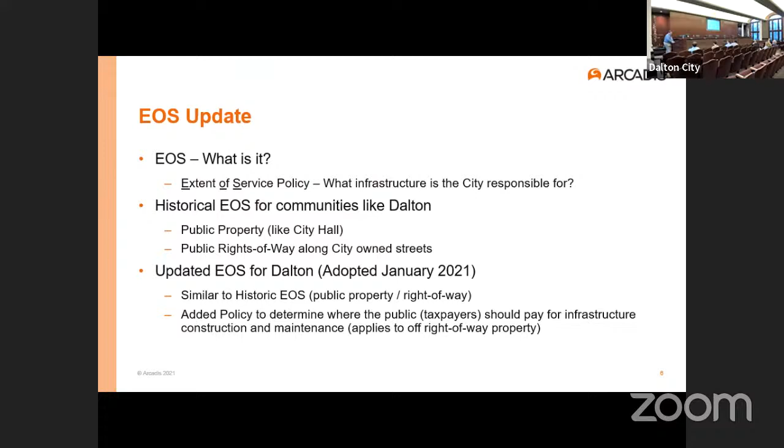In January of last year, Dalton updated their extent of service policy. They kept the historic policy where they're still responsible for roads and public properties, but added a caveat that they will determine where the public, or taxpayers, where your money would be spent working on infrastructure, either building or maintaining it, on off right-of-way situations, on private property. So there's a policy now of where they think the public should have an investment in infrastructure that's not on public property.

This is kind of a précis of the actual policy, but they will work off right of way on drainage systems if the system is connected directly to the city's existing system. Think about a couple inlets on a road with a pipe between them. The pipe comes out one side, goes off the right of way, and dumps water into a ditch. It didn't seem fair that the private property owner should be responsible for that last 20 feet of pipe, so there's a clear case that part of the system is actually part of the public system, and they should take that on under certain conditions.

Another factor they look at is if there's a significant amount of stormwater runoff conveyed by the drainage system that's generated by city-owned property or city right-of-way. In the case of Walnut North, if you're living just south of Emory Street, there's about 50 acres of drainage coming down off the city cemetery, city-owned property, and off Emory Street, and then it goes into private drainage systems. So there's a case that the bulk of that water is coming from city property or city-owned right-of-way.

There's also a case to be made that in select situations, the failure of a drainage system could result in a significant threat to the public and/or adjacent property. So it's kind of a catch-all: if this pipe collapses, 50 homes in this area may get flooded. That would be a case where there's probably a public benefit to maintaining that infrastructure with taxpayer money. So those are the three cases we'll look at for off right-of-way property. Remember, everything on the street is still the city's responsibility, it's just a question of where we'll consider going off right-of-way.

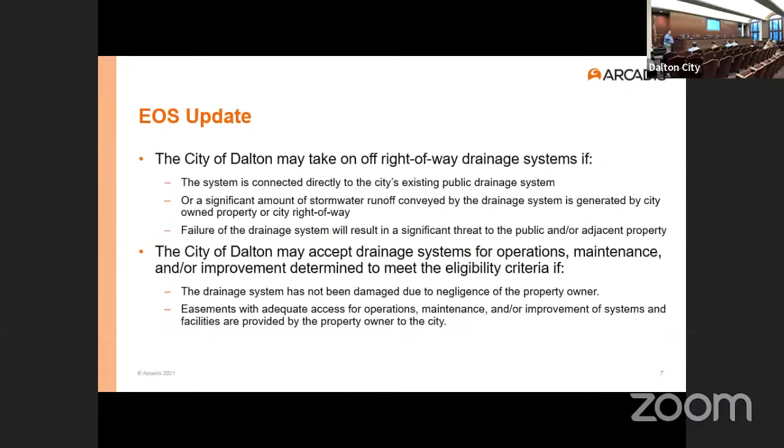The other situation where the city feels it's just too great a risk is if a pipe goes under an existing building. There's a lot of risk when you start messing with pipes under buildings—you could damage the building doing that. So that's one of those situations where it gets to an unacceptable risk level.

But prior to accepting the drainage easement, if you're in a situation where we can do work off right-of-way in that area, the public works director will prepare and provide the city council a corrective action plan to address known deficiencies with the drainage system.

So why that's important: let's say you've got a pipe on your property. Chad, the public works director, can't accept an easement from you—that's not his job, that's outside the city council, the guys that sit up here. They're the ones that accept it on behalf of the city. They'll positively say, we will accept this drainage system and expend public monies on it. It can't be some deal that somebody works out with Chad, or Jackson, or even Andrew—this is beyond their pay grade.

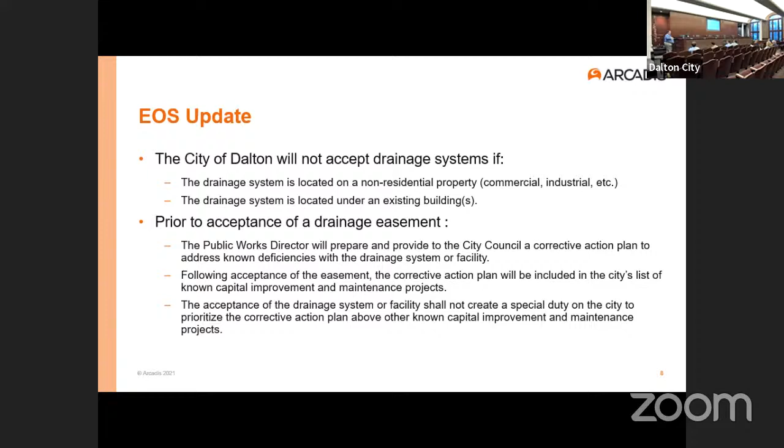So let's talk about that list, the capital improvement program, CIP—sometimes you guys hear that term bandied around. That's what we're talking about here. Currently, we're cataloging and prioritizing known stormwater needs. The last time I looked, there were over 40 projects on the list of issues that need to be looked at.

A lot of the project types involve flooding of homes, flooding of buildings, stream degradation resulting in potential property damage, and failing infrastructure. We've got a lot of pipes—we've got an inventory. Literally, the city has a map of all the drainage pipes on public property, rights of way, and things like that. I forget, there's thousands—I want to say there are like 10,000 assets in that database.

Of those, we've got quite a few what we call Tier 1A assets. These are pipes that go under a road—if that pipe fails, there's no way for residents to get out. It's a one-way-in, one-way-out neighborhood. That pipe collapses, they can't get out, emergency services can't get in. These are high risk assets, and there's quite a few of them.

I don't remember the exact number, but 3,000 linear feet of those are corrugated metal pipes with about a 25-year life expectancy. Jackson here actually went out and looked at every single one of them, and those are being put into the list as well for rehabilitation. And then finally, we're looking at stormwater management infrastructure—things that can be done to reduce flooding.

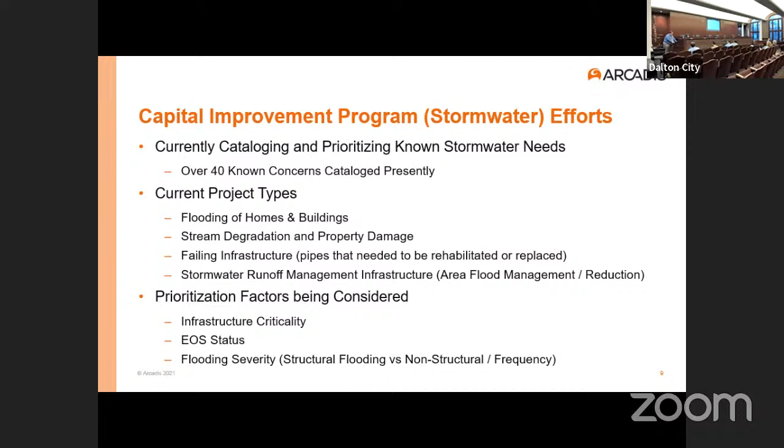So that all goes into how we got to today. We've got flooding problems on private property that are within the extent of service policy. We've got houses flooding with a significant amount of water coming from public property. And that's how we got to today.

But before we jump onto the Walnut North project, we're going to talk a little bit about some of the recent efforts and current efforts so you guys can see what we're talking about. Jackson's going to come up and talk about that right now.

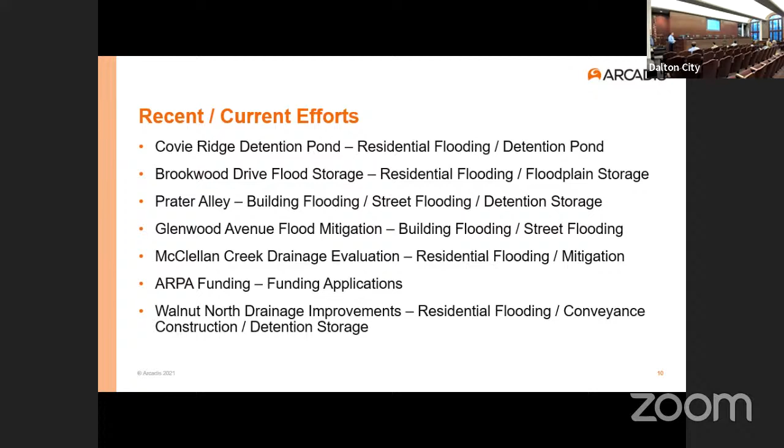So what I'm going to go through is some of our recent completed projects, as well as our current efforts throughout the city. Just a brief overview.

Starting with Covie Ridge, this is a completed project. This particular location resides within the Mill Creek watershed and has experienced historical residential flooding as well as structural flooding and street flooding. What the city has done is develop and implement a detention pond on undeveloped property to provide meaningful flow attenuation and reduce the flooding risks and hazards within this drainage area.

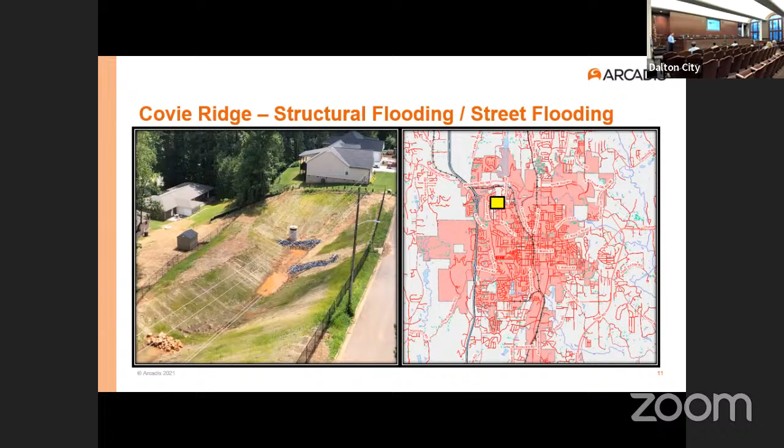Next one is the Brookwood Flood Storage Project, a recently completed project as well. This particular location is vulnerable to flooding—the property where we implemented a flood storage area resides within a 100-year floodplain. We accomplished this under voluntary participation with the property owner: the city purchased the property and removed the impervious surface, displacing water within this drainage basin, and provided a flood staging area prior to entering state waters.

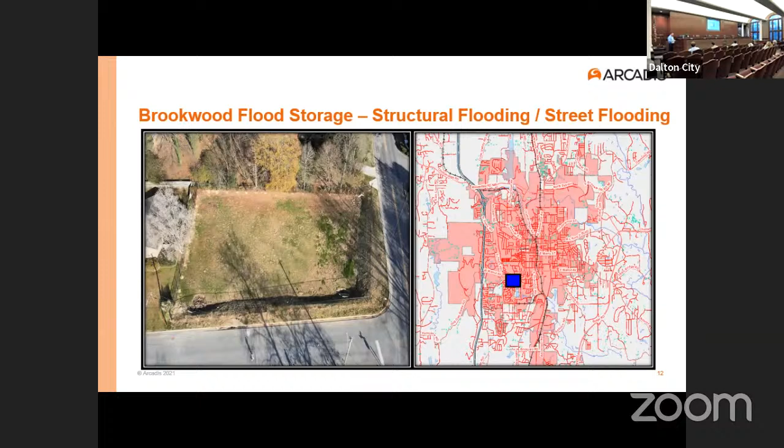This is a prime example of a floodplain restoration project. We're hoping to do similar floodplain restoration projects, not necessarily from existing properties, but we're looking to identify similar situations citywide. Next one is the Prater Alley Drainage Basin Study.

This is one Arcadis has been working on for quite a while now. This is a particular location with historical flooding and structural flooding hazards, and what the city is looking to do is implement an underground detention system upstream of these issues to provide meaningful flow attenuation and reduce the flooding hazards.

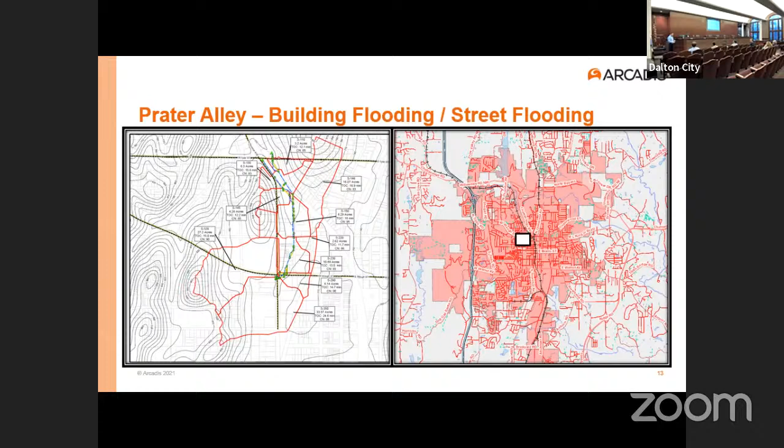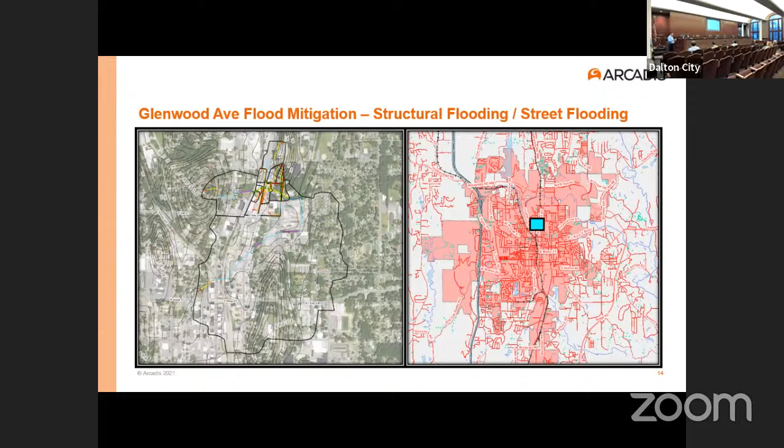Next one is the Glenwood Avenue Flood Mitigation Project. This location also has structural hazards and flooding hazards, and the existing infrastructure on city right-of-way is not conducive for handling intense storm events—we're talking 50-year, or even 25-year storm events.

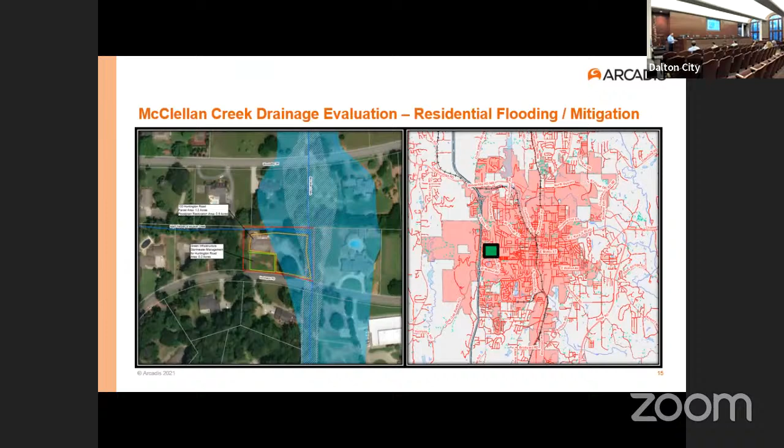McClellan Creek Drainage Evaluation is another thing Arcadis is working on, which is part of our flood abatement plan, where they're taking LiDAR data from USGS and identifying locations where flood mitigation and flow attenuation green infrastructure can be implemented. This particular visual is a location where we've submitted an ARPA grant for, which I'll get to in just a second. But basically, this is a prime example of properties located within a 100-year floodplain, and we're looking to implement some sort of green infrastructure to provide relief within this drainage area.

Next we'll go to grants. This is an example of one we've recently applied for and unfortunately did not get awarded funding for—the ARPA grant, which goes through the state. The 4 projects we tried to get additional money for were Prater Alley, Glenwood Avenue, McClellan Creek—that particular project shown before this slide—as well as a culvert rehab where critical infrastructure needs to be restored.

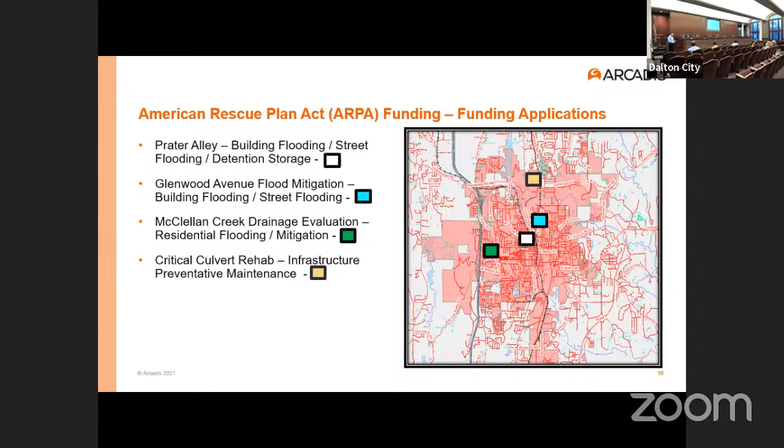ARPA funding is a prime example. There are other funding options out there, and we're fully looking to pursue anything we can to acquire state and federal help on top of anything from SPLOST funds. So this is something we're hoping to seek out on an annual basis.

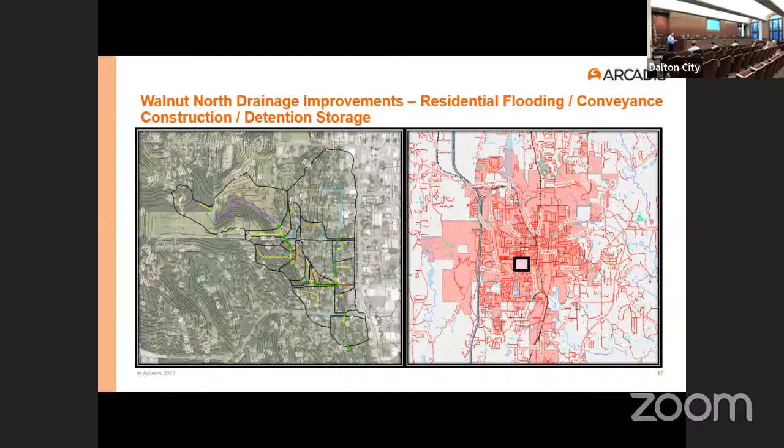So now we get to the Walnut North Drainage Basin. This is the exact same situation as the other completed projects and our ongoing efforts, where you have residential flooding hazards as well as structural flooding. It's a common theme amongst all these, and why they've been prioritized and brought to the top of the list.

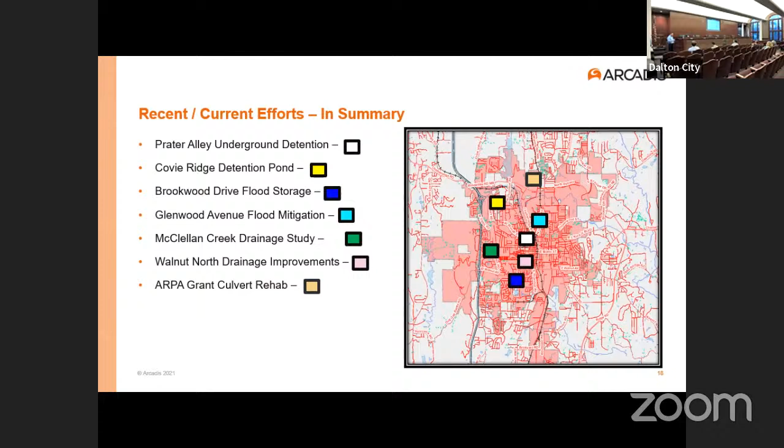This gives you a good overview of all of our ongoing efforts. This is a citywide effort, and we're trying to tackle as much as we possibly can, as efficiently and as quickly as we can, because I know there are flooding hazards throughout the city, and it is our priority to do so. From here, I'll pass it back to Rich.

While I was sitting there listening to Jackson, I want to add two things about the grants. A question that's floating out there is, why didn't we apply for grant funding for y'all's work? I actually asked Andrew that a while back. Anytime you get federal grant funding, everything slows way down and there's a lot more paperwork. So the city, Andrew and the city council felt like we need to keep this thing moving. That's why that was not on the list.

The other thing is, there are a lot of projects, and as you saw, a lot of the factors were we were looking at where are homes flooding, where are buildings flooding. So that's been kind of the thing.

The last thing I'd note is the ones that are done, those were the easy ones. Those were the ones where there was a real obvious solution that didn't require a lot of coordination with property owners, because the people affected just said, okay, we can do this. And it was relatively small projects. So Walnut North is neither simple nor small.

The drainage basin is significant. There are two basic branches. One starts up in the cemetery and drains down to... let me back up. I apologize, Alex is the modeler, so if y'all were here last time, he's the expert. I'm just going to try to do as best a facsimile as I can of what he does. Hopefully I'll make him proud.

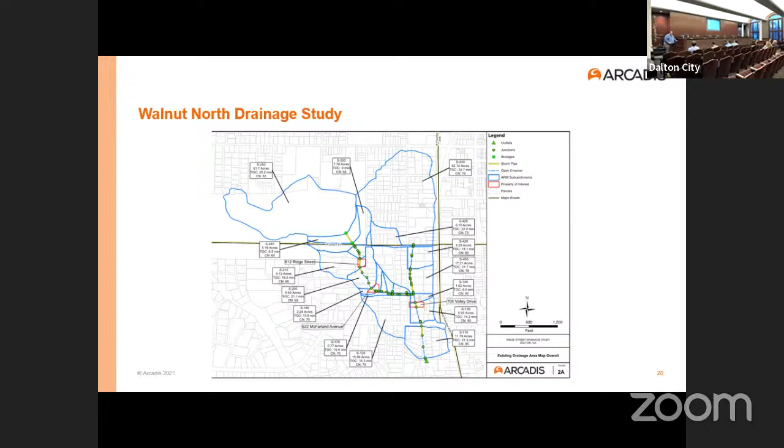Anyway, this is a drainage basin. As you can see, there's a lot of drainage coming down from the north from the cemetery, and then it drains down through y'all's properties for those of you who live in the area. I forget the exact drainage area, but I know there's this kind of polygon, the upper left-hand one, that's about 50 acres to give you some scale. So it's hundreds of acres of drainage coming down to the channel at Walnut.

Let's talk a little bit about when we were turned loose on this, which was last spring or summer. We were told to start working on this. The primary drainage path we were told to study was from the West Hill Cemetery down to Walnut Avenue. That's because we knew that's where a lot of the drainage complaints the city had received were located. We needed to create a computer model of sufficient detail, which wound up being quite complex, to test improvement scenarios.

In other words, we tried to build a model that replicated what you guys were seeing out there in the real world, so that when we started putting in ideas, we could say, okay, does this make things better? Does this make things worse? Make sure that whatever we're doing is creating a benefit to the community.

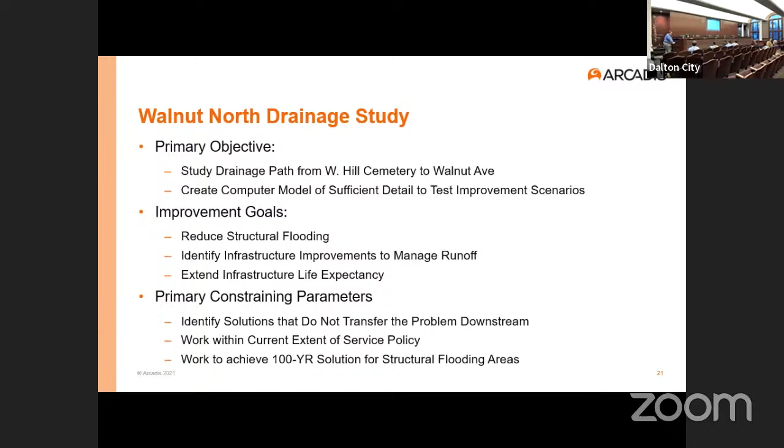Our primary improvement goals were to reduce structural flooding, in other words home flooding, identify improvements that could manage the runoff better, and extend the infrastructure life expectancy that's out there. Primary constraining parameters: identify solutions that do not transfer the problem. In other words, don't fix one problem and make another worse. Work within the current extent of service policy, those factors we talked about earlier, and work to achieve a 100-year solution for structural flooding areas.

In other words, we want to significantly reduce the frequency of flooding inside homes. This is a table just to give you guys an idea, since I know I throw terms like 100-year, 5-year level of service around.

100-year storm is really kind of a misnomer. The idea is there's a 1% chance any given year that you're going to see that storm event.

The example I always give is think about playing a game at home with dice. You got a 6-sided dice, 1 through 6, and you throw it. There's a 1 in 6 chance you're going to see a 6 on that throw. That doesn't mean if you throw it again you can't see another 6. It just means every time you throw it, there's a 1 in 6 chance you see that 6 on that throw.

So that's when we say return frequency in years, we're really talking about there's about a 1 in 100 chance that you're going to see that in any given year.

For storm depth, just to give you an idea of what that means, a 1-year storm event is about 3.2 inches of rain in 24 hours in this area. A 100-year is almost 7.7 inches.

To give you some real world comparison, for those who remember the storm in April 2020, that was about 6 inches of rain, so it probably corresponded somewhere in the 25-year event - not a 100-year event. The one that happened in March of last year was about 3.7 inches, so that was about a 2-year storm event.

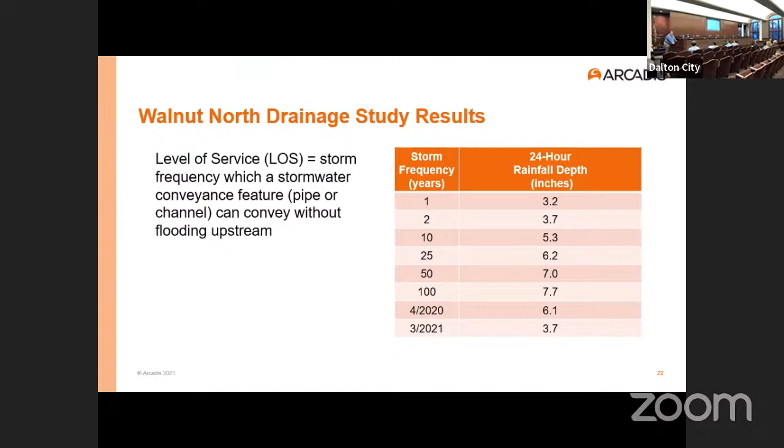So when we say 100-year, we're talking about significant amounts of rainwater coming down and turning into runoff.

As I mentioned, Alex built this model of the existing conditions, and then he started testing scenarios - things we thought might be feasible to implement that could make things better. He wound up testing, at the end of the day, 5 different scenarios.

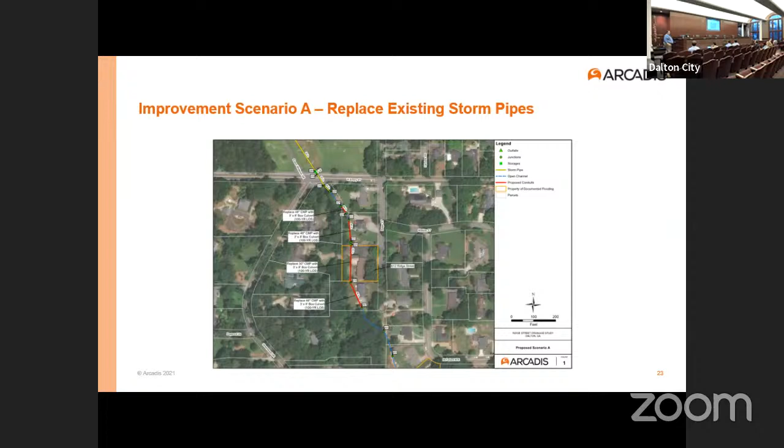The first scenario was to replace the existing storm pipes adjacent to Ridge Street, coming down from the cemetery in the north, the upper end of this photograph, all the way down. In other words, if there's flooding because there's just not pipe capacity, let's just make the pipes bigger.

So we got to the end of scenario A and said, okay, what does this all mean? It means we provided a 100-year level of service in the Ridge Street area and reduced flooding along Ridge Street. The downside is we're going to do a lot of significant work - tearing up backyards, working well off the right of way, making life generally miserable for people that live along those pipes.

We also are going to create a long-term maintenance responsibility on private property, so anytime there needs to be work, public works crews are going to be back there working on that system. And again, we transferred the problem, which at the end of the day is really a negative. So we did not feel like scenario A was going to work.

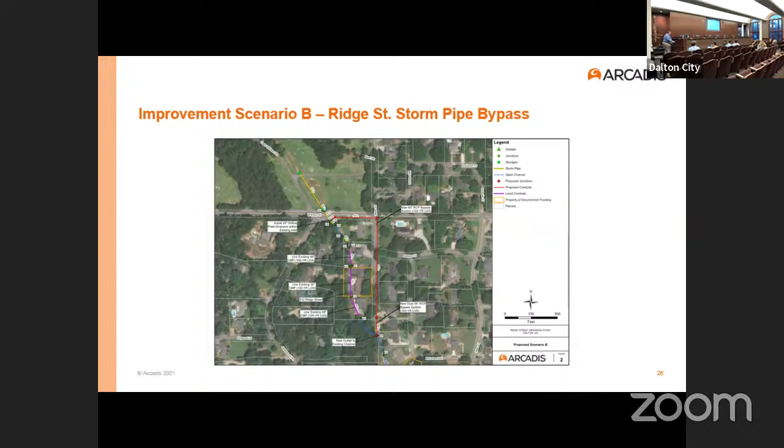A lot of times you'll hear us refer to it as the Ridge Street Storm Pipe Bypass. We're basically moving the water around - we're going to pick it up on Emory Street, move it around the site. Again, you see those green numbers up on Ridge Street - it did a great job of reducing flooding up there.

The downside is he couldn't find a solution that didn't transfer the problem downstream again. It's very similar - rather than moving it through here, we just moved it to the right. But we couldn't find a solution that didn't transfer flooding downstream to downstream neighbors.

So again, we liked that it provided 100-year level service. We liked that it reduced the flooding along those areas. We liked the fact that most of the work was going to be on public right of way, but it was an unacceptable solution because it transferred the flooding. We're like, okay, we can't just pipe it around.

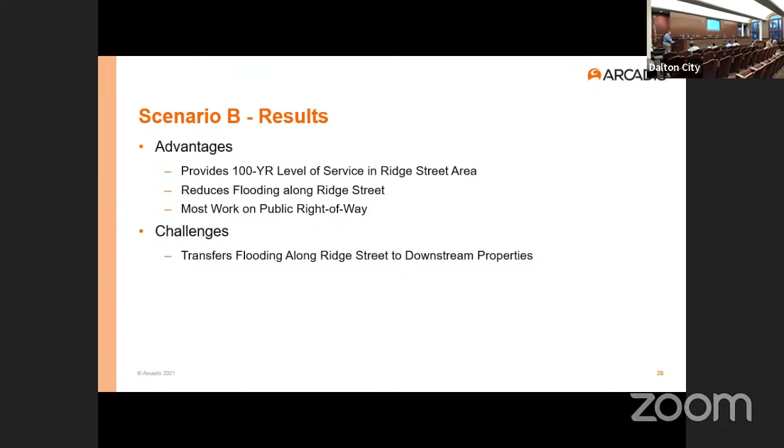What if, rather than trying to just move the water, what if we made it less? We reduce the amount of water coming down that hill. And that's what improvement scenario C is. You'll hear us refer to it as the West Hill Cemetery improvements.

What we were going to do is those blue areas. This is Emory Street running left to right at the bottom of the slide. To the north you see two blue areas - those are existing, one is an existing detention pond, another is an existing ditch. We're going to dig those out and make it so water can stack up in those holding areas and release it more slowly downstream.

The green area to the north of that is what's called a regenerative stormwater conveyance. There's a ditch - you guys can go out there tomorrow if you want and see all of this. There's a riprap line ditch where that green area is.

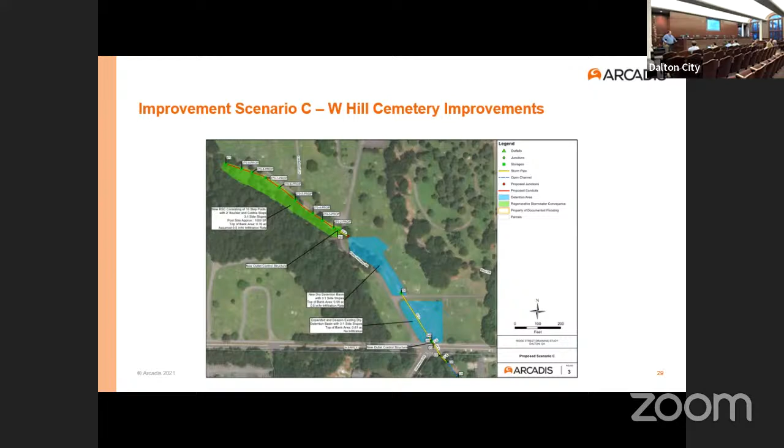Water comes down off the hill, going pretty fast. What we're proposing in this scenario is to build a series of small holding basins, if you will, and let them fill up one after another, after another. Hold them there and reduce the amount of water that goes downstream, releasing it very slowly in combination with these detention ponds. So the idea is the amount of water leaving Emory Street and heading off right away is going to be significantly reduced from a flow standpoint.

That being said, what we found in this scenario was it only provided some improvement to the existing infrastructure. As I mentioned earlier, when we started this, we were trying to go to a 100-year level of service. We don't want homes to flood up to and including the 100-year storm event - we shouldn't see water going into Mr. Snyder's house or downstream along West Franklin. We don't want to see flooding there. And this definitely makes it better, but it doesn't get anywhere near that level of service we were looking to achieve with this program.

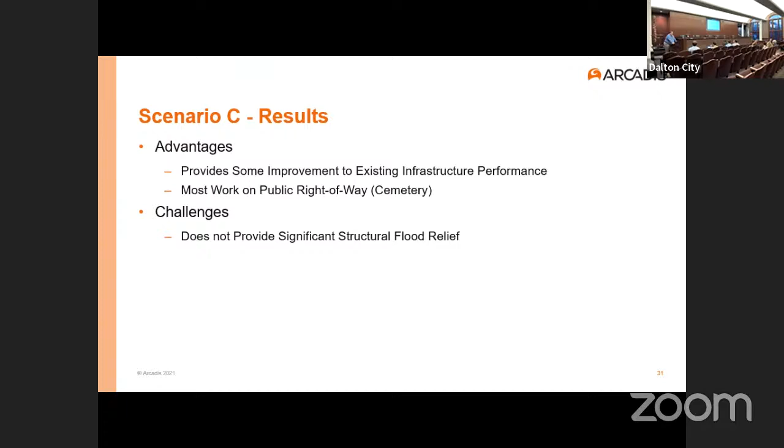And again, we like the fact that most of the work was on public right of way, so we're not tearing up private property doing this. Again, the major challenge here is it just doesn't - it gets us some of the way, but not where we need to be.

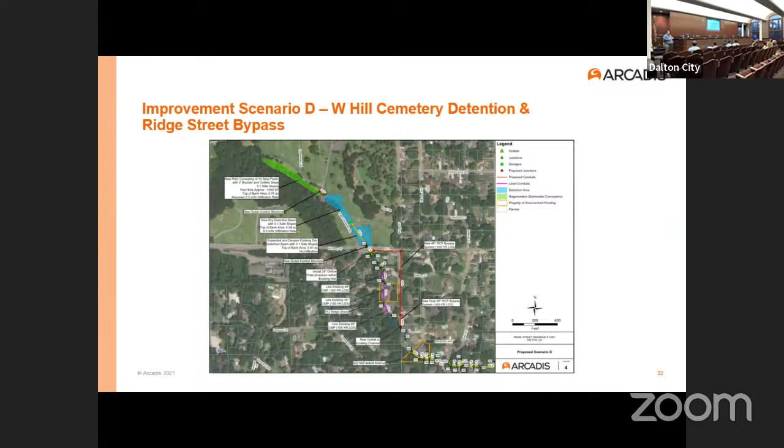So after that, Alex started saying, okay, what if I take a little piece of this, a little piece of that, and a little piece of this over here, and we start putting things together? He said, well, we like that the Ridge Street bypass system in scenario B solved the flooding problem, and that it was on public property for the most part. What we didn't like was the transfer problem. So what if we took all that work in the cemetery combined with the Ridge Street bypass system? What does that do to us?

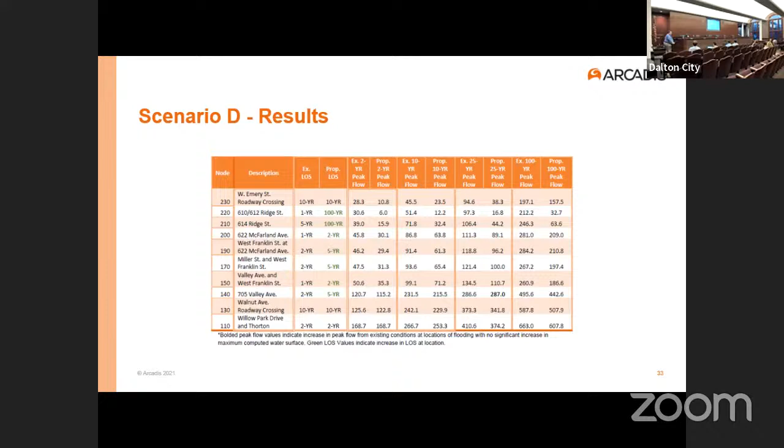As you can see, similar to what we saw in scenario C, we get improvements all along the waterway, including 100-year level of service along Ridge Street. Those homes along Ridge Street would see 100-year level of service in those existing drainage areas, and we're not transferring the problem. So that's when we started kind of getting hope. Again, the advantages here is we achieved the goals of the program of reducing structural flooding adjacent to Ridge Street. We didn't transfer anything downstream, so we didn't have to worry about folks along West Franklin getting flooded.

It did provide some improvement to the existing downstream infrastructure performance. So we didn't solve the flooding problem down there, but we definitely were going to make it a little bit better. And again, most of the work was on public right of way.

So that's how we got to scenario E, which is kind of all of that, plus some improvements along West Franklin Street, a little bit along McFarland, and then all the way down to Valley Avenue by adding some improvements there. So this is kind of the conglomeration of all of them.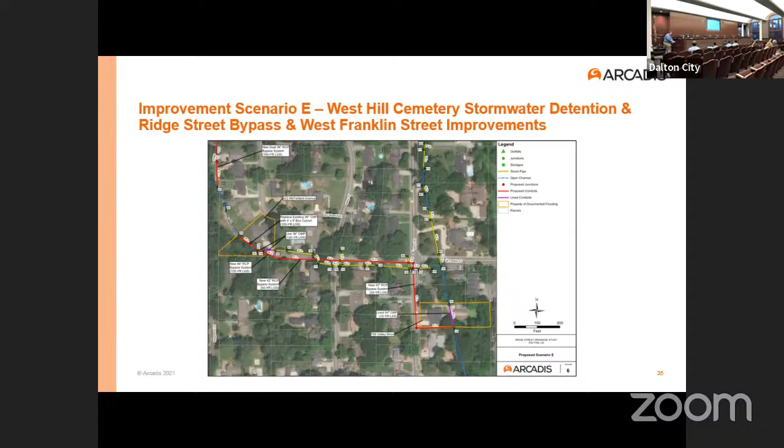Again, lots of green on the left. We're getting great performance, especially where we were having homes flood, and we're getting no transfer problem downstream. So this was kind of where we're like, okay, we think we've got it.

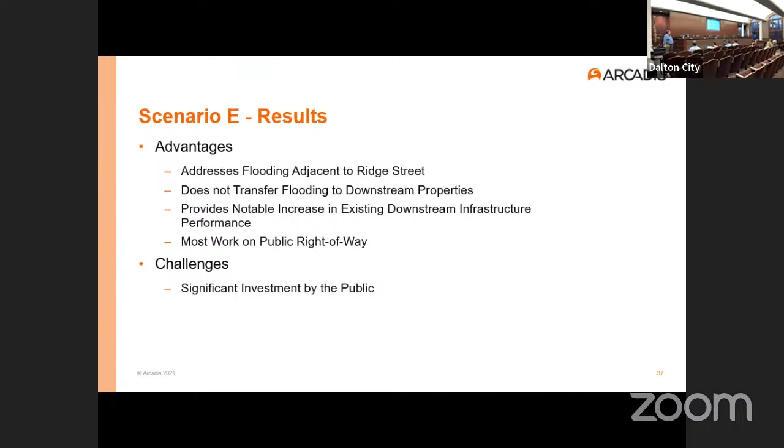There really were lots of great advantages that we just talked about. The only downside was this is a significant improvement, or significant investment by the public, by the taxpayer, to address these things. So that is not—I hate to say this—but that's not an engineering problem. That's a public works director, city administrator problem to go find the money. So that's where we ended the study.

So let me walk you through real quick. A typical engineering project has multiple phases. Alex didn't really touch on this last time, but there's usually a study phase that results in a concept. Like we say, okay, we think this will address the problem, which is what Alex came up with. Then we go into an engineering design phase, which has multiple steps.

We go into what sometimes you'll hear us say 30% design. I don't want you guys to think that we only did 30% of the work. The 30% design is we took Alex's concept and I gave it to Taylor here, who's a civil engineer who does actual construction plans, and say, Taylor, Alex came up with this great idea. Now go make it work in the real world.

And then he sits there and struggles and he says, okay, I got to deal with these utilities. I got to deal with these driveways. I got to make sure these residents can get in and out of their homes. He takes that concept and turns it into a real world working plan. That's usually only a few pages long, but it's kind of, think of it as proof of concept.

After we get through that proof of concept and say, this is a real deal, we could go out and build this. The next phase is you'll hear us refer to a 60% set of plans. Again, that's not 60% of the work. That's just kind of where we take it to that phase where, okay, these are real construction plans.

There's a set here somewhere of a set of 90% plans. You could go out and build it, but it's kind of that last phase where we're like, okay, here are the plans, here's how we're going to build it. After you get to this phase, there should only be a handful of details that really aren't related to design—things more like how are we going to do restoration, how are we going to do sediment containment, traffic control.

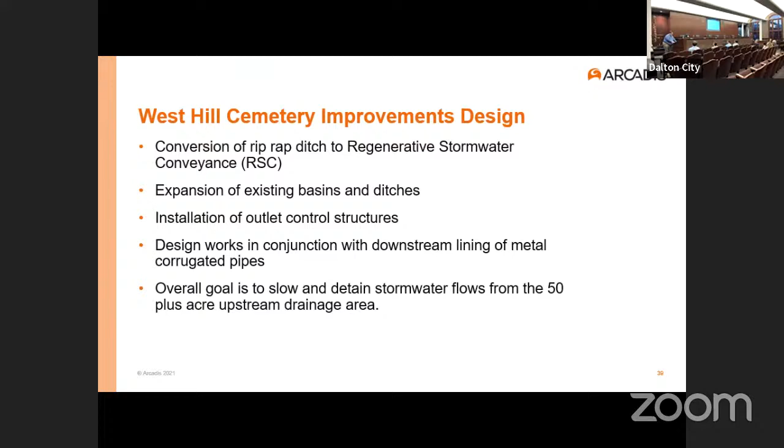Just to give you an example, I realize stormwater regenerative stormwater conveyance doesn't mean a lot to most folks. The picture on the right, that's the riprap lined ditch—you guys can drive up there tomorrow in the daylight and see that. The image on the left is an example of an RSC, or regenerative stormwater conveyance. That ditch was kind of similar in that it just let water run through it, but everywhere you see those pools, they're designed to fill up with water as it rains, hold it in place, and then let it go downstream. That's an example of one that Arcadis designed up in Virginia.

I don't think we've got very many of these in Georgia. It's kind of a new thing down here. It just hadn't caught on yet. It wound up in a state design manual five years or so ago, and we're starting to see people talk about them, but they just hadn't caught on real big with development yet.

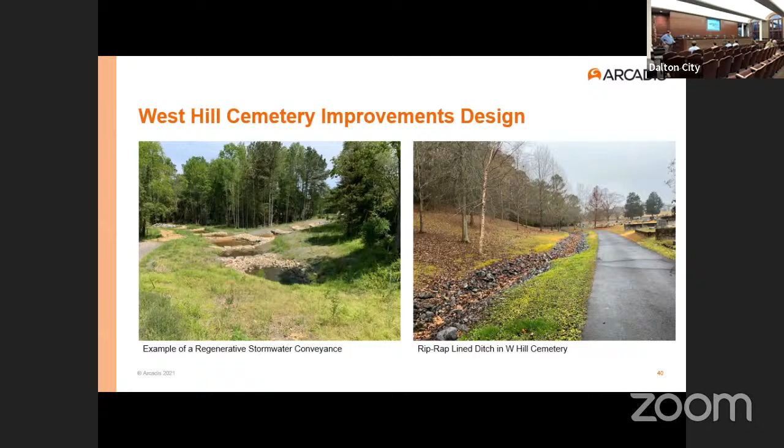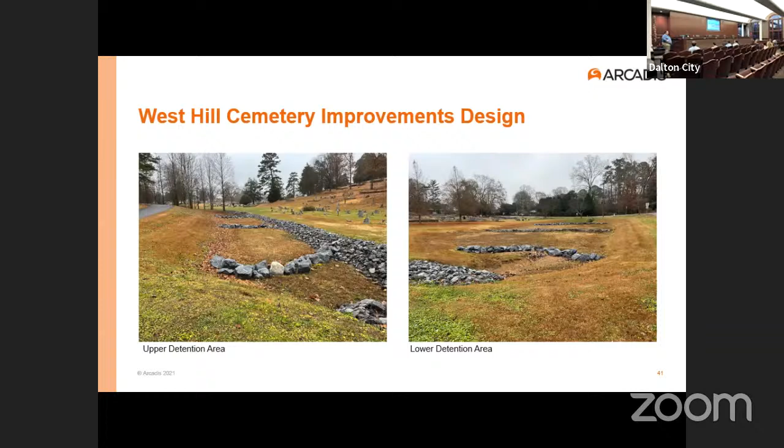These are those blue areas I was showing you earlier, the detention ponds I was referring to. If you guys have been up to West Hill Cemetery and seen those low areas with weird lines of rocks going through them, those are the areas we're talking about. So what we're going to do is dig those out, make them a little deeper and wider, so they can grab that stormwater before it goes under Emory Street, store it temporarily, and let it out slow.

The purpose, again, is to reduce peak flows released downstream, so we can start putting in more efficient conveyances downstream along Ridge Street and other places. We'll increase the level of service downstream just by doing this. Not that we're going to solve the problem—I don't want you guys to think we're going to solve the problem just with this project—but we're going to definitely move the needle enough so that we can do the other things.

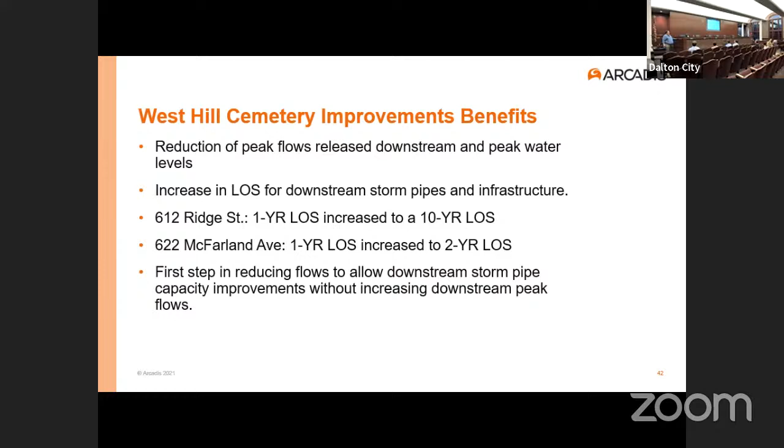For example, at Ridge Street, we're talking about in some cases going from a 1-year level of service up to a 10-year level of service. So we're going to see some reduction in flows there. Same at McFarland Avenue—again, we're going to see some minor adjustments so that we can put in these other things. And I just want to emphasize, this is step one. This is not the final solution. We're creating the conditions so that we can do the other things.

You can kind of see that a little bit. This is Alex, and this really gets into what Alex does—these are the flows at 612 Ridge Street. Along the channel, running parallel to Ridge Street, you can see the existing flows will be roughly cut in half for a 10-year flow. So again, I don't want to imply there's not going to be any water coming down the hill, but it's going to be less during the same storm event.

One of the things Alex modeled—what he's trying to show here—is one of the concerns we had was wanting to know if we could run all the water above Emory Street into a detention pond. Some of it goes into the cemetery, some goes immediately downstream. I asked him to take a look at that and say, can we do that without making things worse? What he found out was we could put it in there, but we're going to reduce the amount of benefit we get. Given that this is a short-term project as far as building this and then building the bypass system, which is going to solve the problem, we felt like, okay, I'd rather get that short-term benefit for the next year or two or whatever that winds up being, and do that.

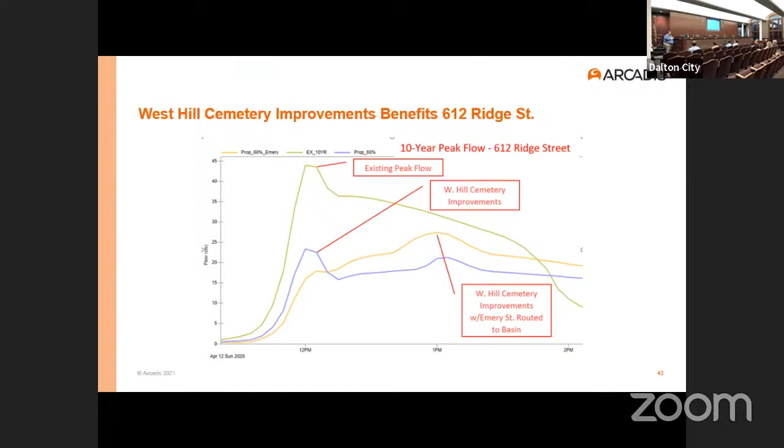This is another hydrograph. So think about it—we put all this stuff in the cemetery, we're obviously going to see some benefits down there at Emory Street and just below it. But even if you get down as far as, say, Ridge Street, right above West Franklin, we're still going to see some benefits from that. And so this is what gave us the confidence that we can put in some of these other systems.

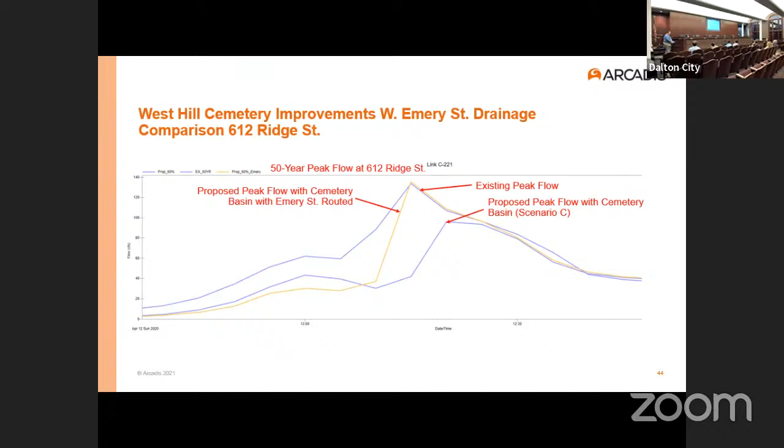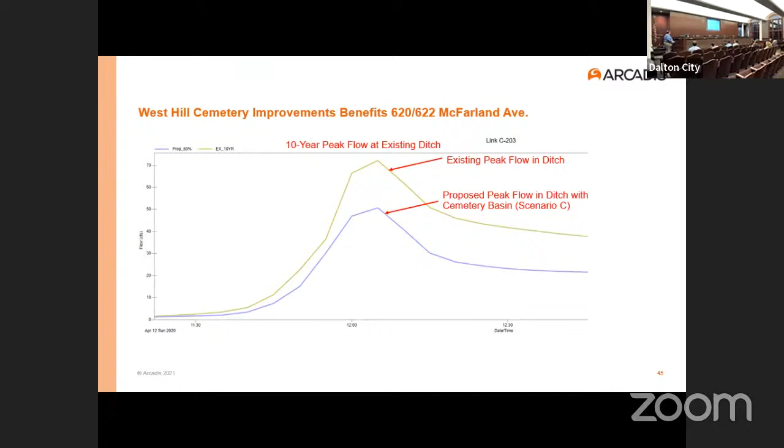This is an example of how we're going to do some of these improvements, just by putting in the detention at the cemetery at McFarland. Long term, one of the residents here along McFarland asked whether this will really make a difference on his property where it's an open channel. What we found was, once all this gets put in, we're going to see a foot reduction in a 10-year storm event. Whereas it may have gotten out of the bank before, now it'll stay in the channel and won't flood the adjacent properties.

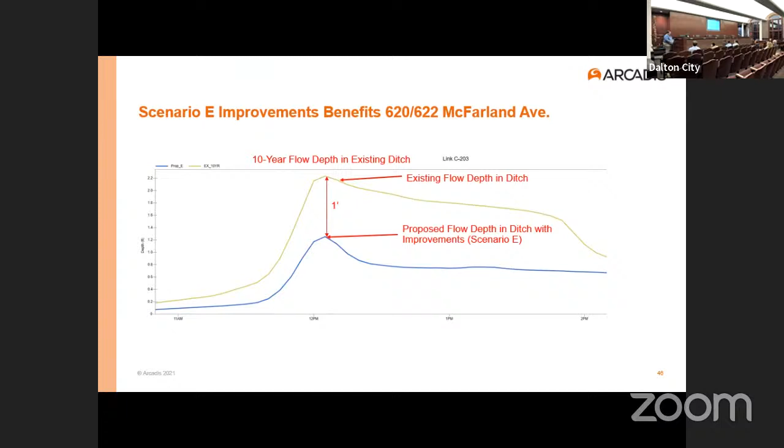So that's kind of where we're at now. We're at a 60% design phase. Jackson has the plans for the cemetery improvements. He's going through those, making sure it's going to check all the boxes for the city. We've got the 60% design review for the cemetery next week. We'll check off on that and then go to 90% for permitting. There's very limited permitting after that — the only person who's got to look at it is the county drainage engineer, who issues the land disturbance permit here in the city. Once he signs off on that, we'll have a set of plans ready to go to construction, and we'll turn that over to the public works guys for bidding.

But moving forward, we've still got to do plans for that Ridge Street bypass, that whole area between Emery Street and, say, McFarland. We've still got to take that from Alex's model and turn it into a set of construction plans — look at all the drainage coming down Ridge Street, all the drainage coming down through those pipes, look at all those factors, and turn that into a set of actual construction plans. So take that concept, the Ridge Street bypass, and turn it into a full-blown set of construction plans along with all the other improvements that go along with that. We're still working on some of those factors.

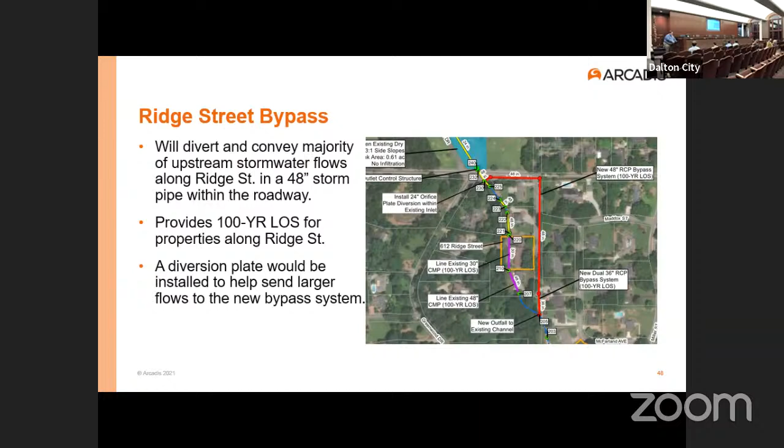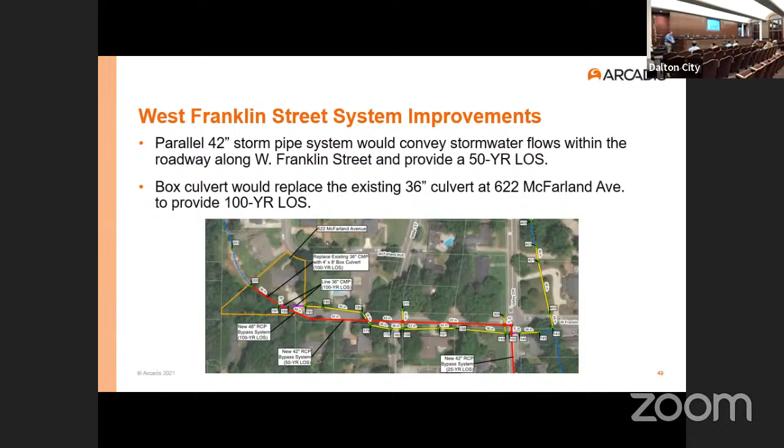Then another phase will be looking at those West Franklin Street improvements, building a parallel drainage system to the existing one. That'll take water coming down from Ridge, coming down parallel to McFarland, and pick up that drainage with some additional piping in order to reduce structural flooding along there. Ultimately, the plan right now is to take it down valley and dump it out into the existing channel behind those homes, downstream of 705 Valley, which also has some structural flooding concerns, and then stabilize the channel along Valley Drive.

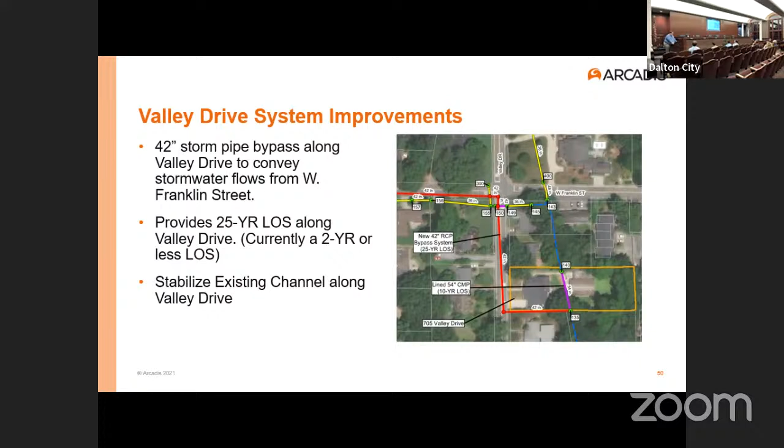So that's kind of where we're at. Like I said, there's still a lot of details to work out. Taylor, Alex, and I had a discussion earlier this week — or maybe it was last week — and we discussed what all the data gaps are and what the challenges are going to be, and what more data we need to make sure we can turn these concepts into reality and hopefully get you guys some benefits.

Thank you, Rich. Hopefully I did Alex proud.

I've got a couple of quick things before we open it up for questions. As Rich mentioned, we've really put a lot of focus on the cemetery improvements because we've got money allocated for at least that phase right now — it's sitting in a project account. We've been using it; we've had to do ground penetrating radar to make sure there are no graves in some of those older sections where we're talking about making the detention areas wider. A lot of logistical work that really tees us up to the next phases Rich talked about.

Also, what was included in phase one was a little tough to see on the screen. We can email these slides to you, and I understand from Jorge, our IT director, that on the YouTube video you can view them in high res — you'll see it better than what the screen projects. The plan calls for lining several pipes throughout the basin that exist today. As Rich mentioned earlier, here in North Georgia, those corrugated metal pipes see an average lifespan of 25 to 30 years.